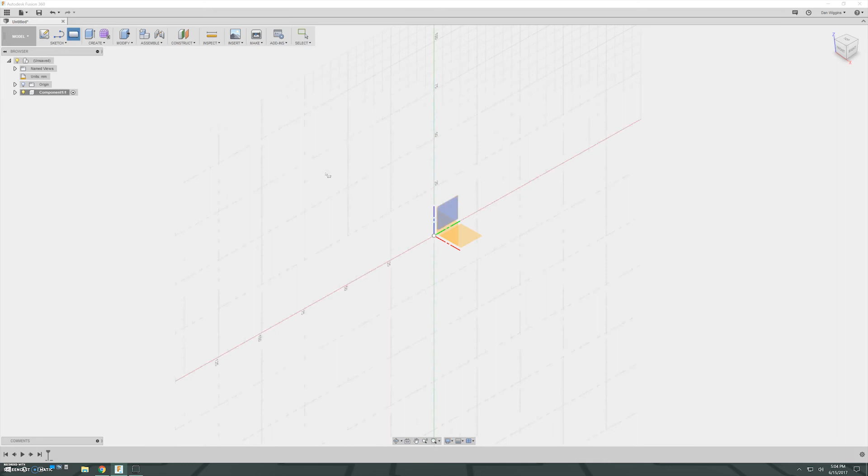I'm using Fusion 360 to design these feet for my bed's legs. The first thing I did was create a component. And now I'm making a sketch of a square since the legs on my bed are square tubing. The legs are 30 millimeters in either direction, and this square will be the platform each leg will rest on. To make the fit slide on easier, I'm adding a tolerance of 0.2 millimeters to each side. This should all make sense here shortly.

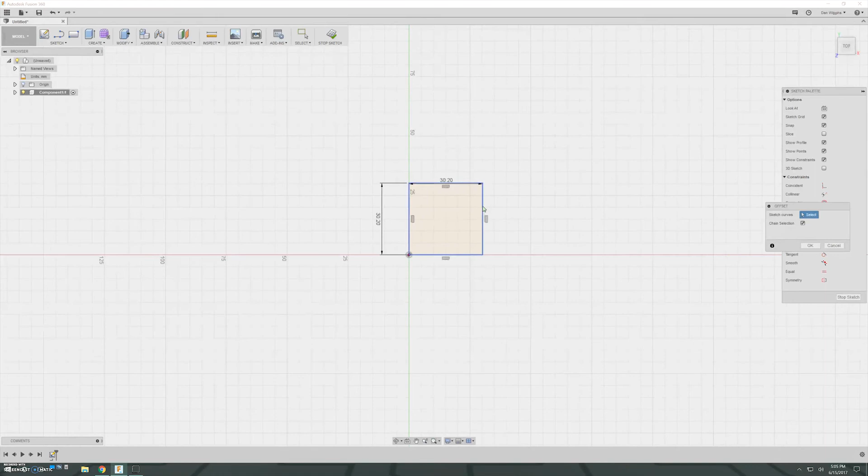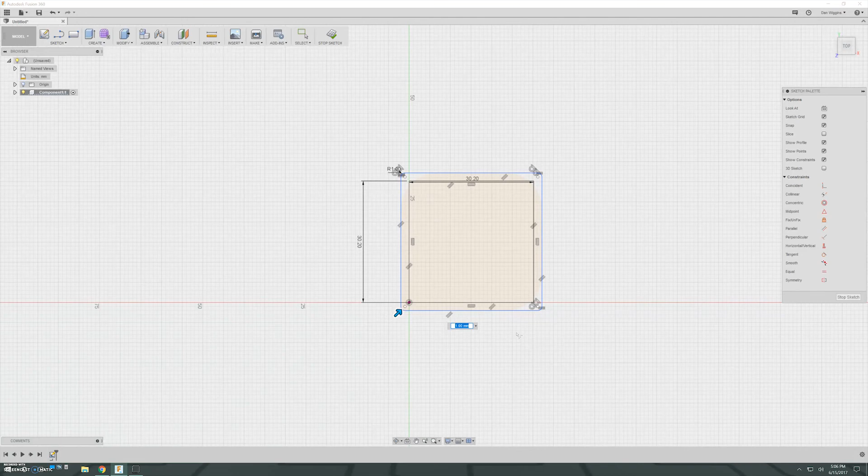To make the walls of the foot, I'm just going to use the offset tool to make another square around the first square that is 2 millimeters bigger in every direction. When extruded up, it will make 2 millimeter thick walls. Now I am using the fillet tool to round over the sides of the foot to make them less sharp, and this will also make them a little more aesthetically pleasing. I can select all corners and change them at once to the same size.

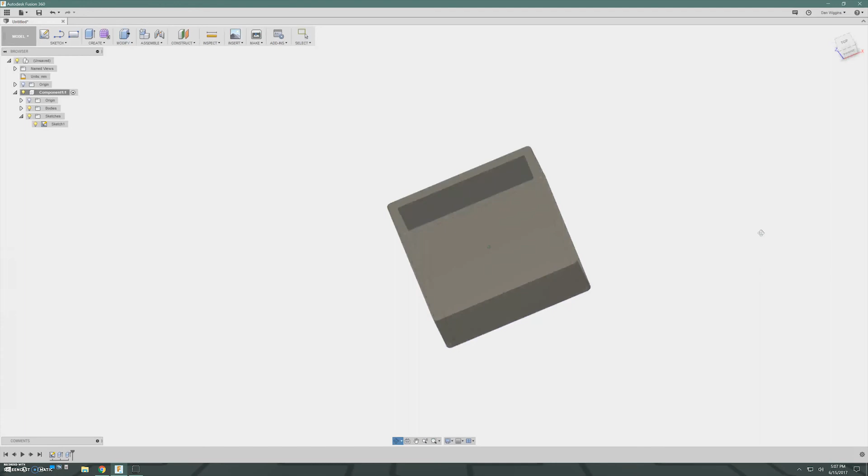I am now going to extrude the blue selected part to make the walls of the foot. I extruded to 12 millimeters to make the walls 10 millimeters tall on the inside, since I planned on extruding the bottom square platform to 2 millimeters. To do this, I just have to turn on the sketch again and select the inner square. Then I can extrude 2 millimeters and have the operation set to join so it will be one solid part. And here it is. This part was really easy to create and should show you that designing things in 3D can be easier than you might think.

After seeing that the test part fit perfectly, I printed 2 different sizes. The left one is the test part with the 2 millimeter thick bottom. The middle ones are 6 millimeters thick, and the one on the right is 15 millimeters thick. I really only needed to use one of the middle ones and the 15 millimeter one. The 3 back legs of my bed against the wall and the middle leg on the front half of my bed contact the floor, and it's just the 2 legs at the head and foot on the front half of the bed that do not contact the floor.

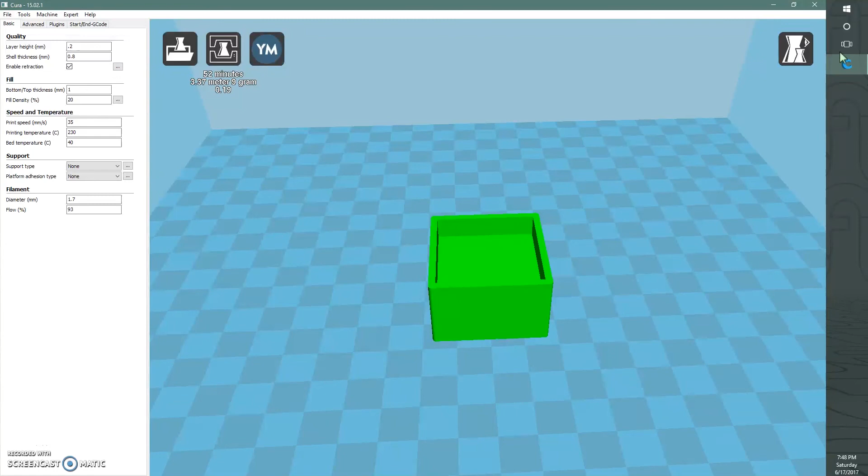As I'm showing some of the dimensions, you can see I had some bed adhesion issues causing the corners to lift. This is PCTPE by Taulman, and it's a flexible filament that I haven't printed too much with, but it's great at being strong and flexible. This part was printed at a 20% infill and was also printed with a slightly clogged nozzle without my prior knowledge. This led to a part that was way too squishy for a structural part.

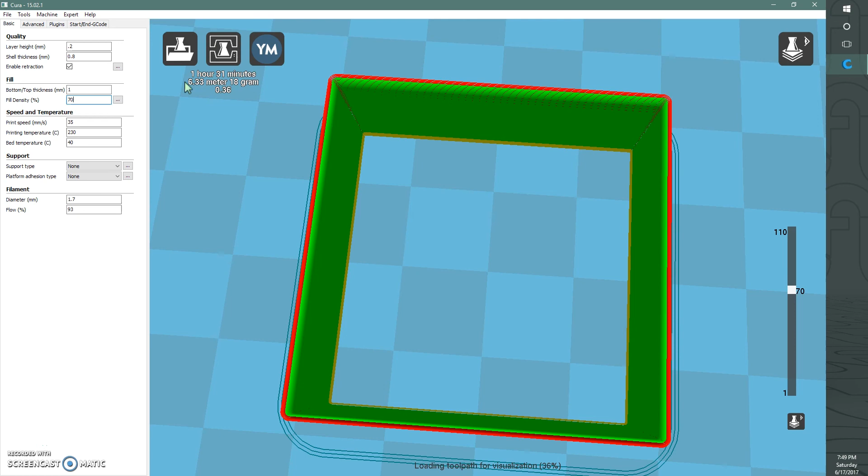I will show you in my slicer Cura what the infill looks like when changed. Having a denser infill will make the print stronger, but can waste time and material after a certain point, so I'm comparing the differences between 50, 60, and 70% infills. After all this, I eventually went with a 65% infill because mathematically, for some reason, it was slightly better than 60% on material usage and time while being potentially stronger. This can possibly be because of how the slicer fills the cube with the grid. I'm not fully sure.

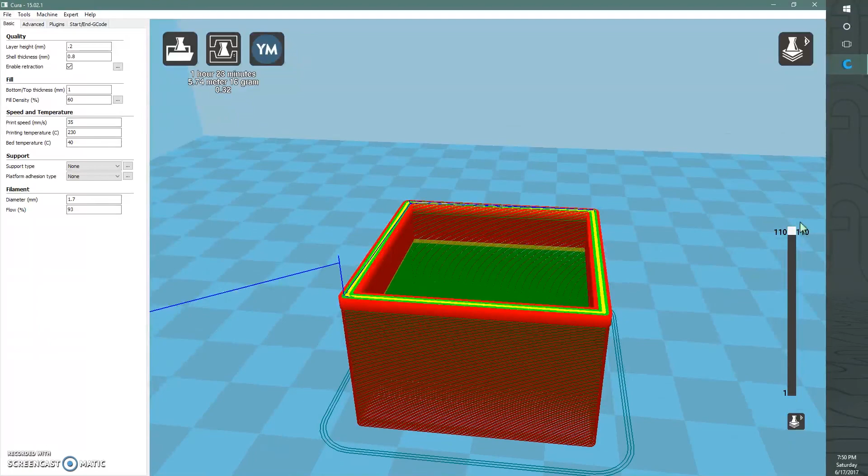Here's the old part. It is super squishy, as you can see. Here's the new part printed at a 65% infill. It's very solid and doesn't compress at all. This piece in the middle is a failed print because the nozzle had a clog in it. This is partly why the old part failed and was so squishy. It also had delamination on some of the layers. This thing is so soft it feels like a foam or a sponge.

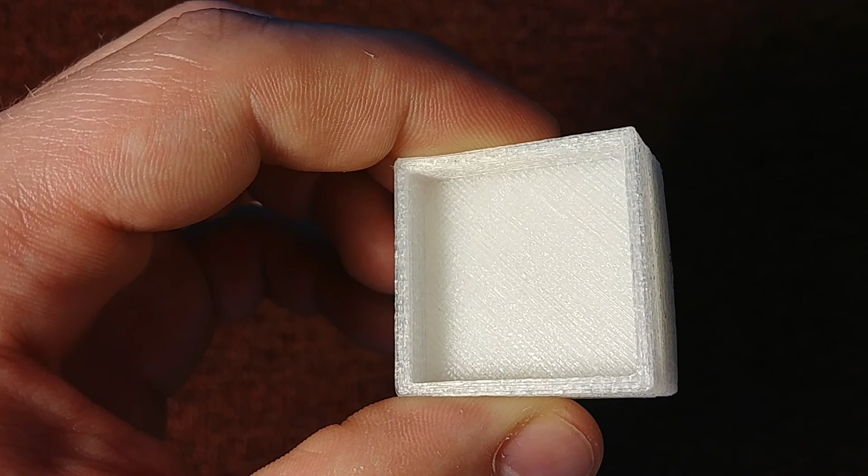Since it was basically printing thin strings instead of solid plastic, it basically weaved a 3D mesh together, which is very cool as a material, but not useful structurally. If someone could reliably print PCTPE this way, it could be like a good insole for these 3D printed shoes you're seeing, or anything else that needs to be soft. But overall, this final one works really well, even though its corners did peel up a little. Look at that, no flex.